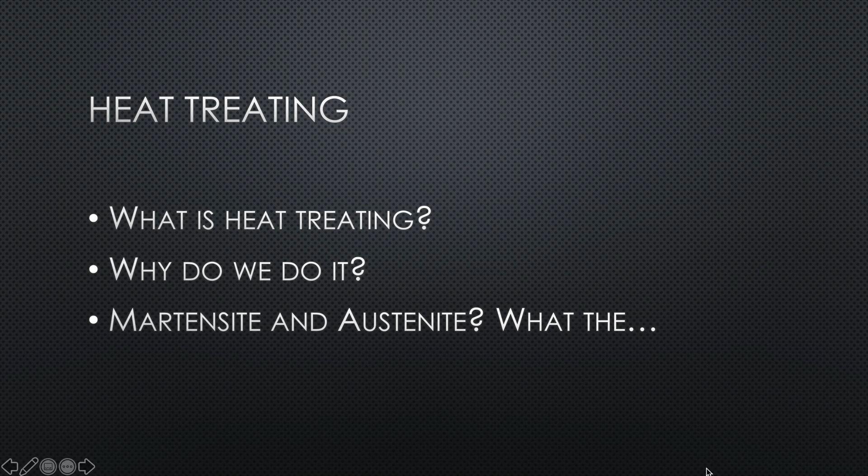This is one of those really daunting subjects. When you first get into knife making, you read some of the forums and people are talking about all these fancy terms: martensite, austenite, pearlite. It's really confusing. So I figured I would put this together to help you guys understand these terms and what to do. So we want martensite.

They're cool. Steel has a crystalline structure. Martensite is the state where steel is hardened, and of course that's the one we want, but we need to figure out how to get there. And austenite is the state of the steel right before you quench. So you need to reach these austenitizing temperatures, and you're going to hear that term a lot. Austenite is the state of the steel before we quench.

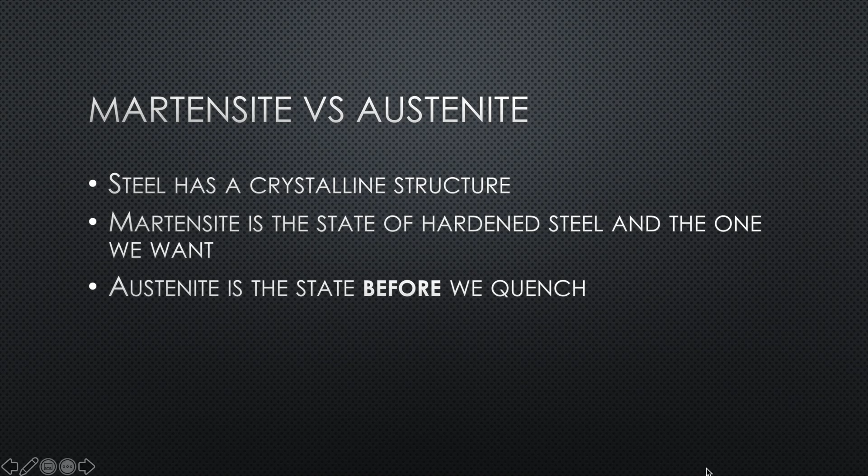So austenite before martensite. Not to be confused with an Aston Martin. And a funny story, a friend of mine who's really into cars, whose last name is Martin, named his son Austin Martin. True story, folks.

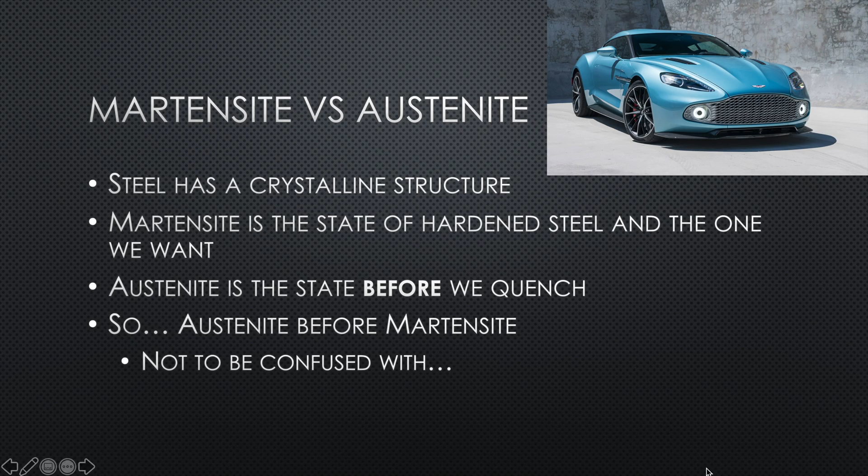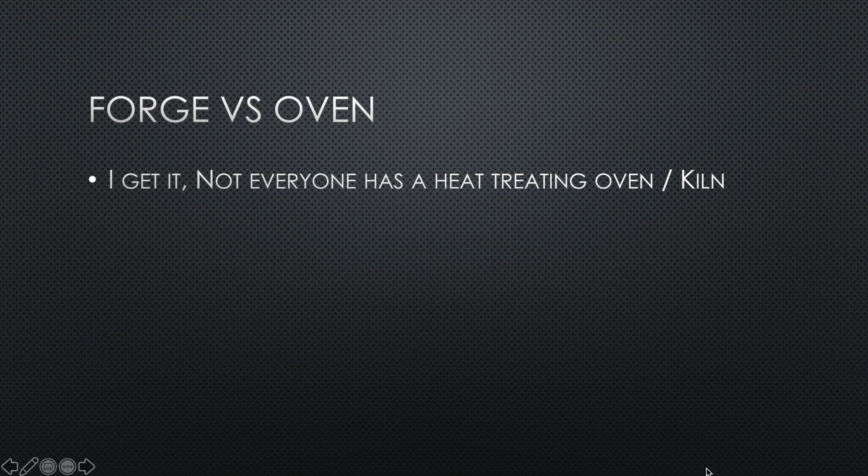So this is always a debatable topic. Do I really need a heat treating oven? I get that not everyone has an oven, and a lot of stuff I'm going to talk about later, especially when we get to my recipes, they're going to assume an oven, but forges are okay. The toughest part about a forge is managing accurate heat, and managing it for a longer period. It's okay if you have a PID, which is a proportional integral derivative controller.

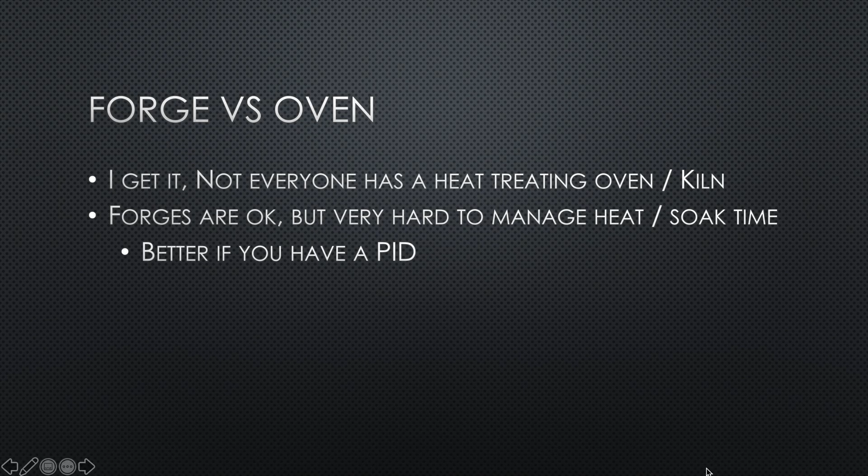Yes, I had to look that up. And that's basically a temperature gauge inside your forge where it will let you control the gas and the air mixture. They're kind of pricey, and by that point, you might as well just buy an oven, in my opinion. Unless there's other reasons you need to use a forge.

Forge tips and tricks. So if you're going to be doing heat treating in a forge, there's a bunch of things you need to know. Everyone kind of gets this one, that magnetism effect, that steel loses its magnetic properties at around 1425. Now, most of the steels, or a lot of the steels that people are using, need to be quenched at 1475. So I hear a lot, I just need to go to non-magnetic and quench. Okay, you're 50 degrees off at that point. So you really need to go a little further.

Another really important aspect here, steel loses its magnetism at 1425, but it doesn't gain it back until it goes under 500 degrees. So I see a lot of people, they'll heat up the steel in one part, and then, through, where they place it in the forge, it'll lose some of its heat, and then they'll keep testing it. I'm like, it's non-magnetic. Well, it still might be under the temperature because it doesn't gain its magnetism back. So be careful of this, folks.

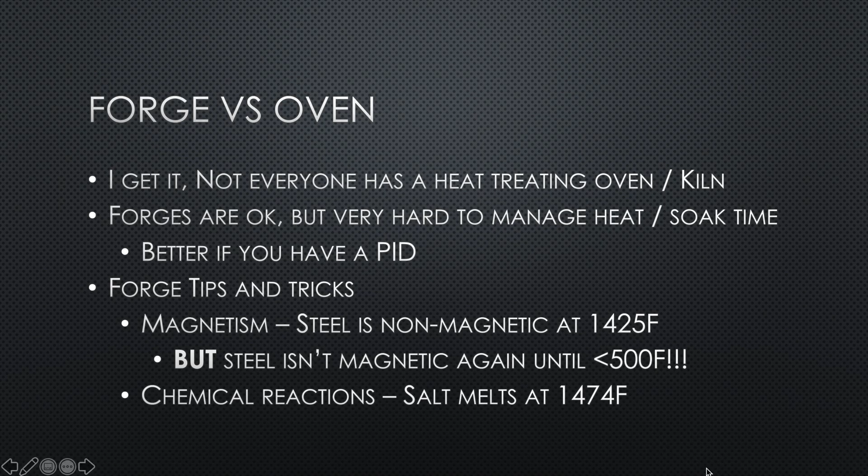There's other ways here that are somewhat a little more accurate. In some chemical reactions, salt happens to melt at 1474, which is almost exactly where you want to quench a lot of steels, like the 10 series, 1080, 1095. So that's a really interesting one. I've never actually done that because I got my oven before I learned this. So some of you might want to try that out.

Another popular one is to get a piece of steel pipe and put that in your forge and put your blade inside that. And that will help you regulate temperature quite a bit.

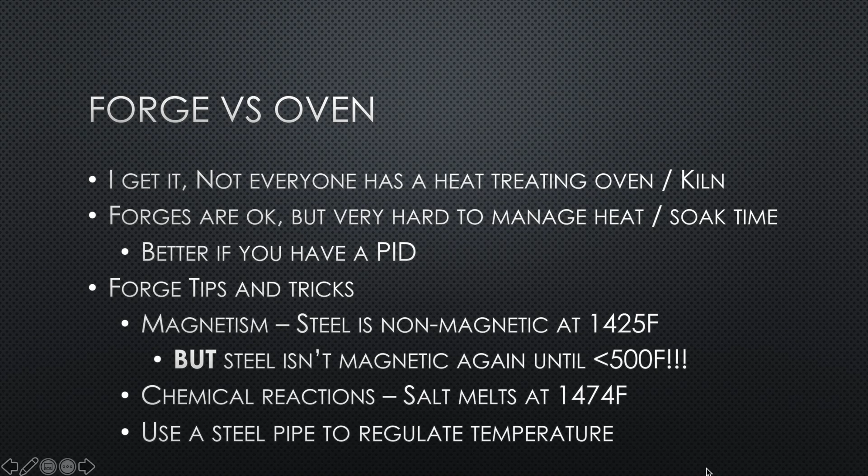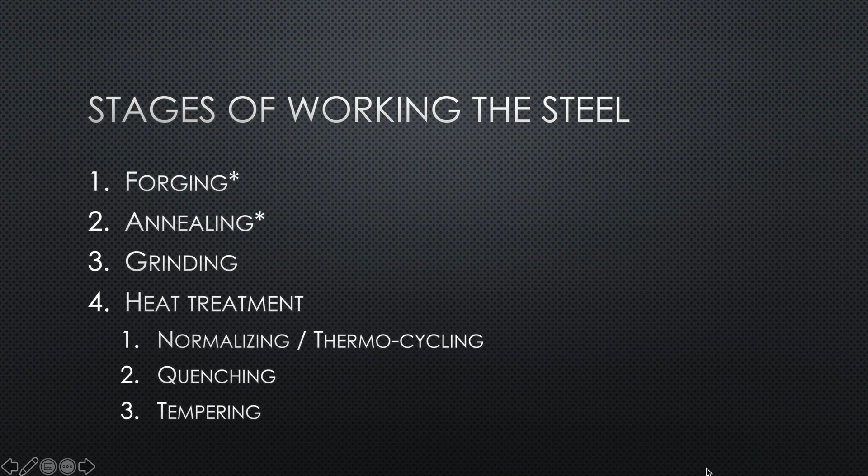So heat treatment, when we say heat treating the steel, it really involves all 3 of these processes: normalizing, thermocycling, quenching, and tempering. And we'll get into each of those. Let's talk about annealing.

So what this does is transforms the steel to its softest state, and this is what you want for grinding or things like that. So in order to do this, we're going to heat it to its austenizing temperature. If it was 1095, for example, you would heat it to 1475.

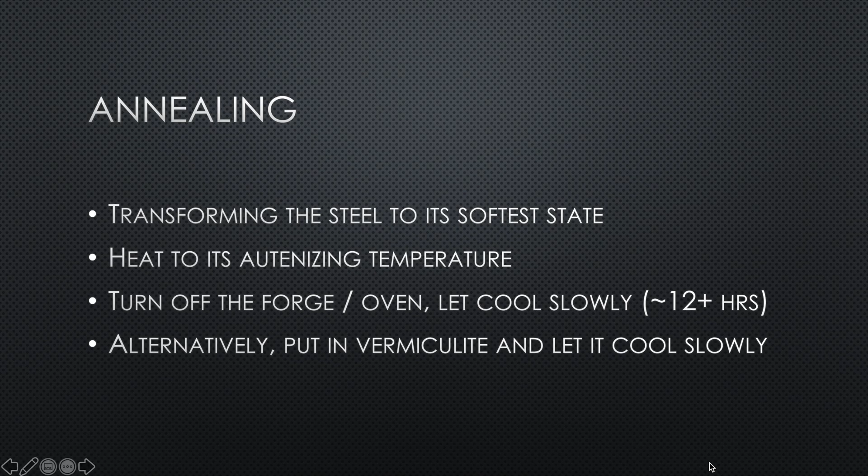We turn off the forge or the oven, and we let it sit in there and cool slowly as the forge or oven cools, usually 12 hours. Alternatively, if you want to keep using your forge or oven, you can place this in a big bucket or steel canister of vermiculite and let it cool slowly.

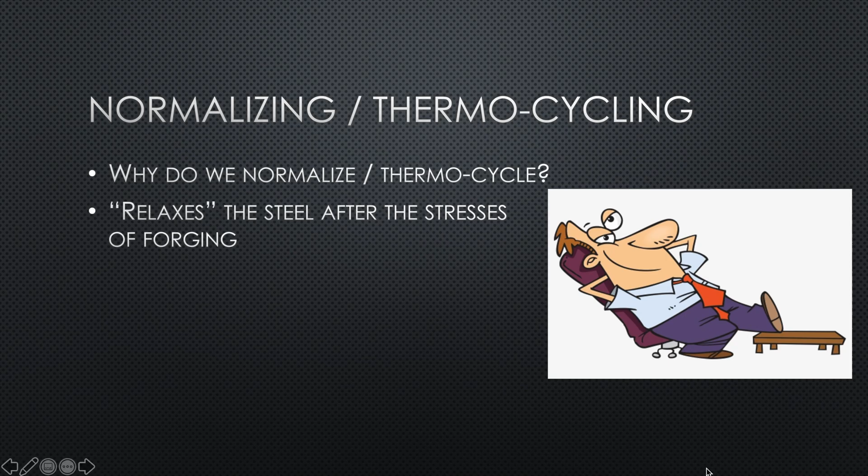Why do we normalize and thermocycle? It relaxes the steel. After the stresses of forging and hammering on it, it's changed the crystalline structure in different places in the steel, and we want it homogeneous, meaning we want all the steel to have the same crystal structure, and a very fine crystal structure.

And it will improve the grain structure, as we talk about. You'll hear people say, oh, check out my grain structure, and they'll have a picture of a snapped blade.

And this just means your blade is less likely to crack and to snap. Having a very coarse or large grain structure means your blade is inherently weaker because those crystal bonds are not as tight.

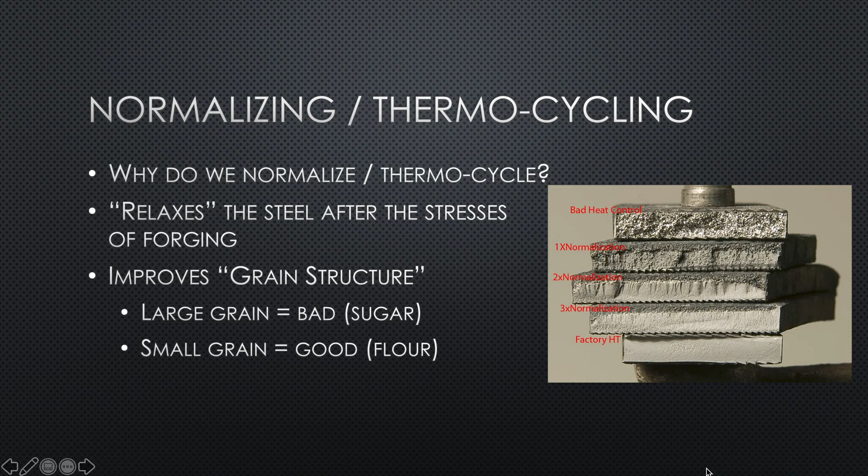So how do we normalize? We're going to heat it above this austenizing temperature and let it cool in still air until it's black, until you can hold it with your hand.

This usually comes in 3 steps. The first temperature you're going to go beyond that austenizing temperature. Then you're going to go below the austenizing temperature. And steps 2 and 3 are typically both below the austenizing temperature.

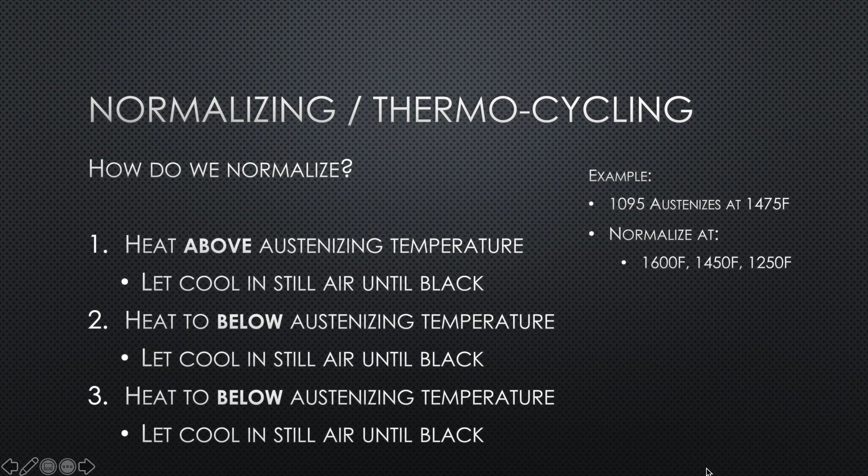So here's an example for 1095, which austenizes at 1475. You're going to normalize at 1600, about 1450, and then 1250.

You need to use the oil that matches the speed of the steel, the quenching speed of the steel. Otherwise, you don't know what's going on.

1095, 1080, the 10 series, W1, W2 require very fast quenching speeds. They need to be quenched in less than a second, meaning the temperature needs to be brought down from the austenizing temperature below 500 degrees in less than a second. So you need an oil that will quench it that fast.

Other steels cannot be quenched fast. If they are, they will crack. 5160, 80CRV, 52100, especially O1, they need a slower quenching oil, something like Parks AAA or even canola.

If you quench something in oil that's not fast enough, you're not getting a hard enough blade, you're not getting what the steel can do. If you're quenching a steel in a quenching oil that's too fast, you're going to crack your blade, and even if you don't see them, you're going to have micro cracks in your blade. Make sure you understand this, and that's why I have 2 kinds of oil.

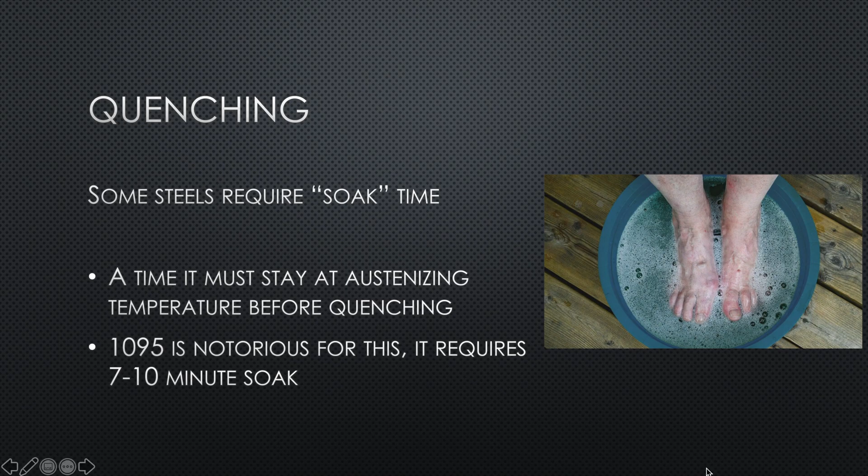Obviously, this is easier, trivial in an oven. So how do we quench? I'm going to talk mostly about oil quenching steels. We'll get into stainless later.

But you need to preheat the oil. I know this sounds counterintuitive, but oil that's heated has less viscosity, it's thinner, and therefore it actually cools the steel quicker. So you do want to preheat your oil, and it's usually around 120 degrees depending on the oil and the steel.

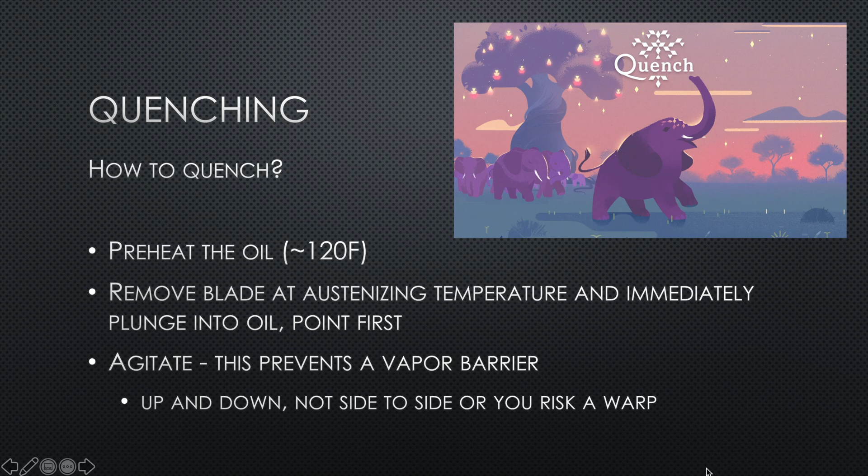You're going to remove the blade from the forge or oven, and plunge it directly into the oil, usually point first, and agitate it, meaning move it around. This will prevent bubbles from forming around the steel and preventing more cooling. You want to continually get fresh oil around your blade as you're moving it up and down. Do up and down, not side to side, since side to side risks warping your blade.

So quench do's and don'ts. Obviously the first one is simple: have a fire extinguisher ready just in case something happens.

You see people on Forged in Fire do this all the time. They'll quench, leave it in the oil for 2 seconds, pull it out, try to skate a file, and it's not hard. Well guys, you didn't leave it in the oil long enough. You hear the judges tell them constantly, you've got to let it cool. Even when you pull it out of the oil, it's still forming those crystals. You should leave it at least 30 seconds before you even try a file test, preferably a minute or two.

Be ready to correct small warps as soon as that thing comes out of the oil. The first thing I do is not to check for hardness, the first thing I do is check for warps. Be ready to temper immediately, have all your stuff ready. You really should temper right after the quench.

So what you shouldn't do - you see this again on Forged in Fire and others - people creating a fireball because they're pulling something out of the oil and it's still hot. If you're creating a fireball, you didn't leave it in the oil long enough.

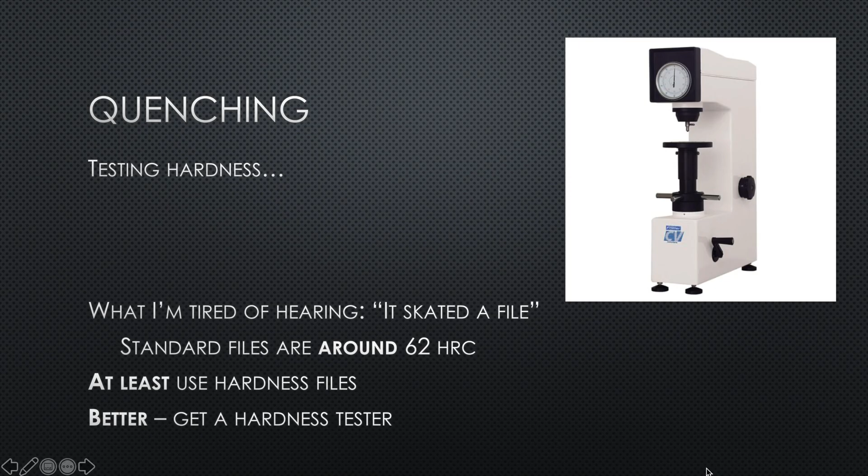So next is the temper. Why do we temper? Basically a quenched blade is going to be like glass - you drop it on the floor, it's going to shatter. We need to improve the toughness of that blade so it's not quite as brittle, but we still want to retain the edge and have it still hard. So it's kind of a fine balance.

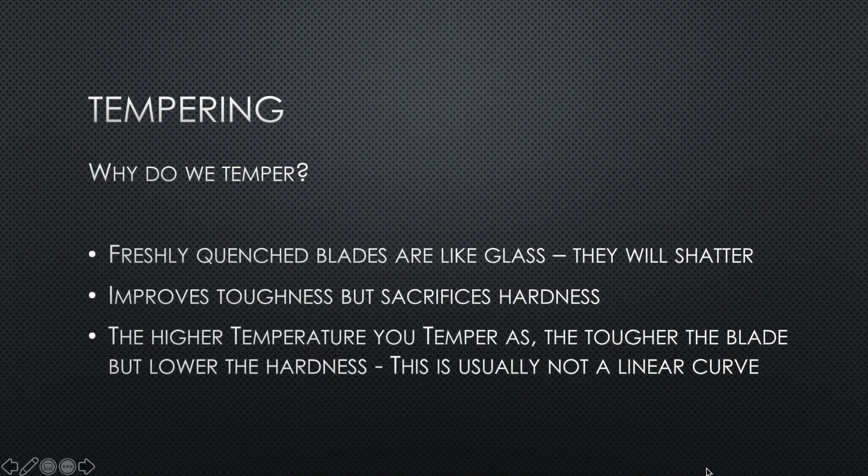The higher the temperature you do in the temper, the tougher your blade, but also you're going to lose more hardness. These usually aren't a linear curve, and each of the steels typically will have a curve that shows you the different temperatures and what hardness you can expect.

So how do we do it? In a kitchen oven, a heat treating oven, both are excellent ways typically. A toaster oven, you can also use.

You need to be careful because sometimes these things have a wild range in their temperatures. Even though you set it at 375, it could go from 325 up to 425, so be careful on toaster ovens. Make sure you preheat to temp before you put your blade in, because otherwise, especially on a toaster oven, you've got that burner right underneath cranking full blast, and it's probably going to go over your temp. Usually everyone will recommend two two-hour cycles at whatever temp you want.

And guys, you can dunk it in water between temper cycles. You don't need to let it cool to black in still air, just go dunk it in water. It's not going to hurt it, it's not going to crack it, don't worry about it. And there's no such thing as over tempering. If you leave your knife in the oven accidentally and fall asleep overnight, it's fine, as long as it didn't go over its temp.

Here I use two things. When I temper, a lot of times I use these two pieces of angle iron that I've put bolts in, just to keep something straight, because sometimes things can warp during temper. So this is just insurance for me. I put the blades in this.

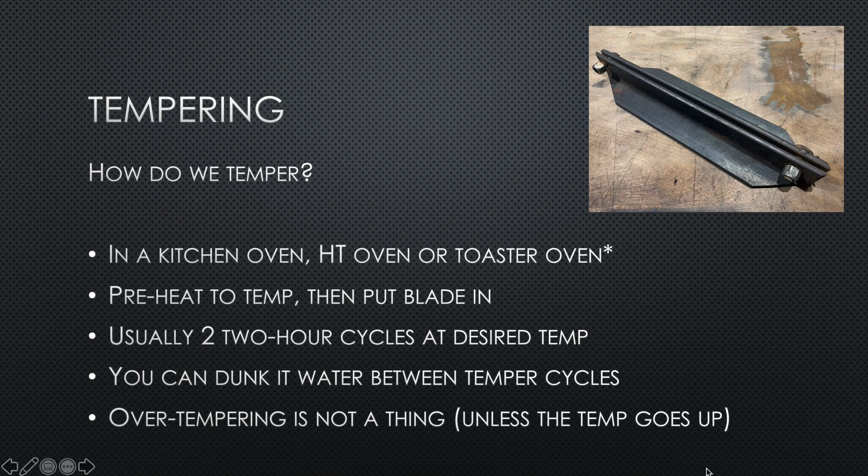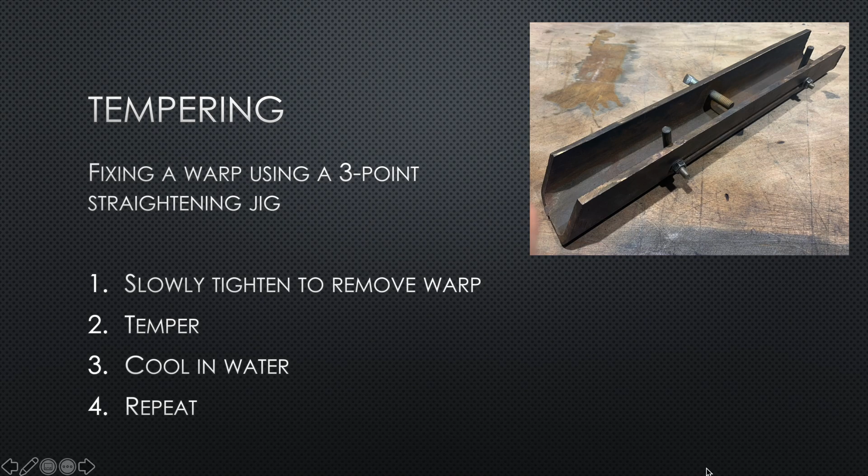Like I said in a previous slide, tighten slowly to remove a warp, then put it in the temper, cool it in water, and just keep going. It's pretty easy to take out a warp just with temperatures.

So you hear people talk about color in torch tempering, and yeah, normally you want a straw color. If it's blue or purple, it's usually way too hot, but color alone is just not a good measure. There can be oil, especially after a quench - I don't typically clean mine completely after a quench, so there's oil and fingerprints and all kinds of stuff on it. So really, color is not a good measure, guys.

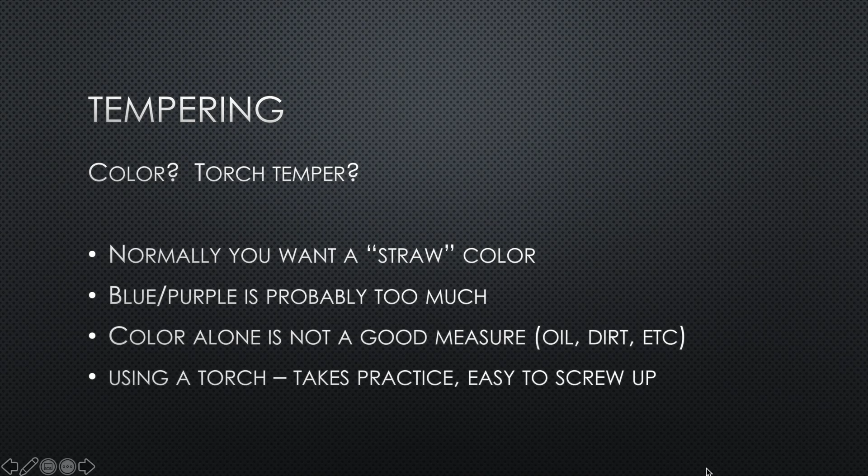When people talk about a torch temper, especially on something really long like a sword that you can't fit in an oven, this might be the only way to do it. It does take practice, it's really easy to screw it up. I've never really done a torch temper, but watch some videos on this. It's not something I would do, given that if I could fit something into an oven, I would do it that way.

So let's talk about stainless steels. Also a question I see all the time: can I use a forge for stainless steel? No, you cannot. They really need a zero oxygen environment. You really need a heat treating oven, because you need to put the blade in stainless steel foil, and that gives it a zero oxygen environment.

And then this thing about cryo, or cryogenically freezing a knife - basically what you're doing, think of a quench, you're reducing the temperature of the steel. Well, we're just reducing it even more. So right after the quench, you're going to put it into either liquid nitrogen or dry ice, and leave it there for a couple hours. This may improve hardness, sometimes up to 3 HRC, depending on the steel and how it's done.

Obviously liquid nitrogen is really, really cold. You'll get two-thirds of the way there with dry ice, and you can do it in your home freezer. You will get some effect from a freezer, despite what people say, but it's questionable.